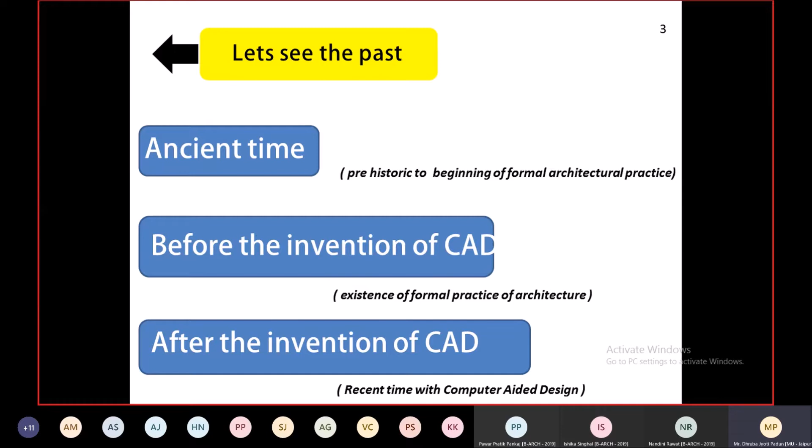Let me go through some facts. The first architect, according to historians, was Imhotep. He designed the first Egyptian pyramid complex around 2600 BCE. These are some facts related to building construction.

The next fact is that the Vedas were written between 1500 and 1000 BC - the holy books of Hinduism: Rig Veda, Atharva Veda, Yajur Veda, and all the Puranas. Then, the Parthenon was completed in 432 BC. And interestingly, paper was invented around 100 BC in China.

So you could see all these projects - the pyramids of Egypt, the Parthenon - were all completed before the invention of paper. You can feel the hard work the designers of these buildings did without having paper, without having any of the drafting tools we have today. Without all these equipments and advantages necessary for architectural education or practice, they designed great structures like the Egyptian pyramids and the Parthenon - all completed before paper was invented.

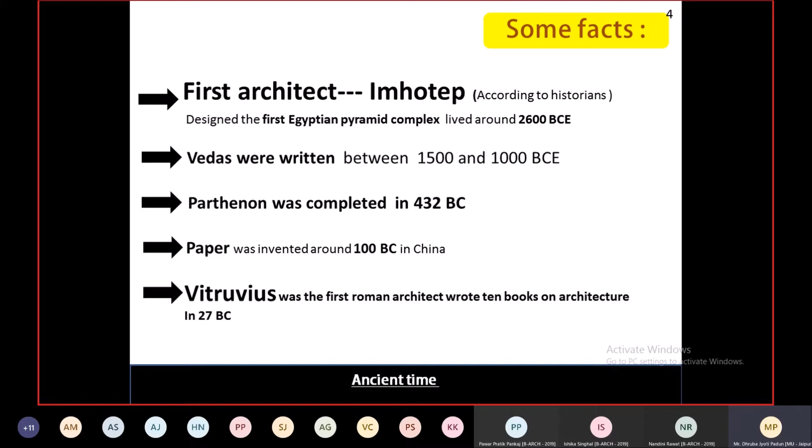If you look at the ancient time, people had very few equipments, less drawing materials, less tools to draw. If you see the cave paintings of Bhimbetka, dating back to the Neolithic or Paleolithic age, you can see how difficult it was to paint on stones without proper sketching tools or inks.

All this was done before the invention of drafting equipment or paper. If you look at the materials used - a bronze tool to scratch into clay tablets - this was the only way people used to draw, make sketches, or design buildings. These were the only tools available at that time, so you can understand how difficult it was to design a building.

Just imagine someone has already designed a building on a clay tablet, and if there is a minor change or modification to that plan, he has to redesign or redraft it again. So how difficult designing a building was in that era has to be understood first, before we talk about architectural software in today's era.

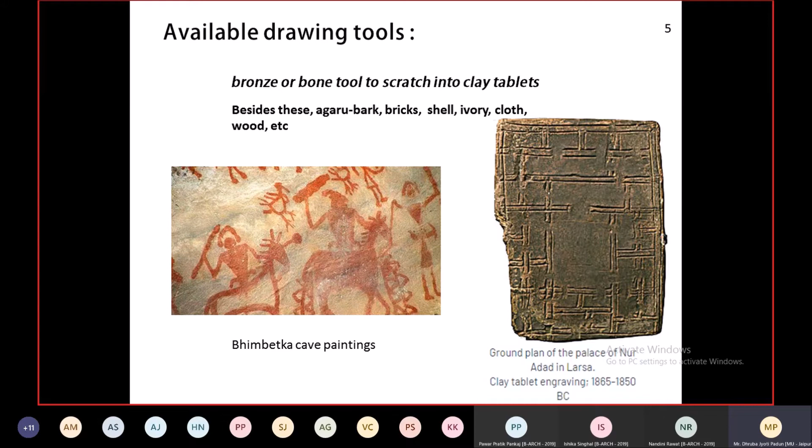Now these are some pictures of the situations before the invention of CAD. People had to lie down like this and draft on large sheets like this. This was very hard - a very complex task to complete at that time.

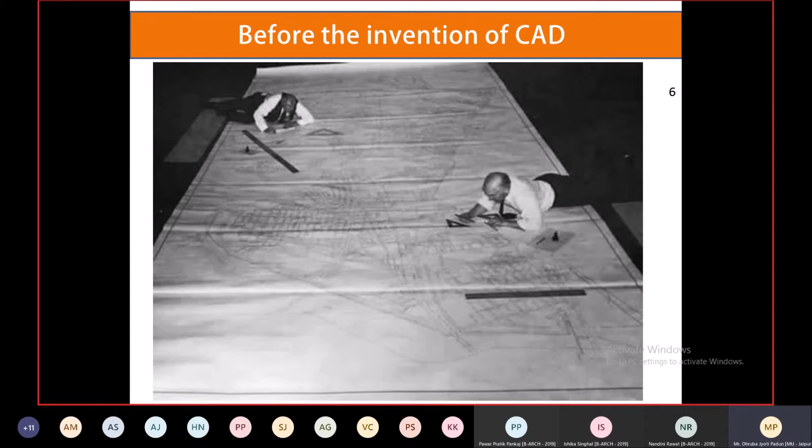Similarly, you could see how people acted like machines, sitting at tables, working on papers with very limited drafting tools and materials. Everything was limited - all the scope, all the instruments were limited at that time.

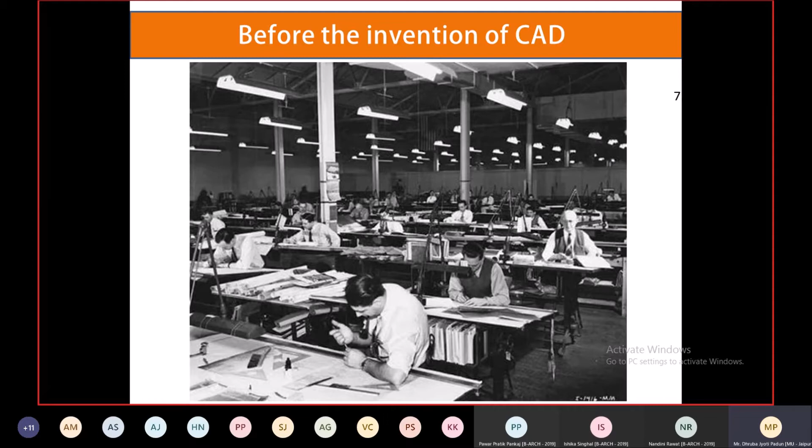So it was a very hard time for the architects or the designers. The process of design and drawing was time consuming. If I had to design even a small residential or commercial building, I had to put a lot of effort and time to complete that design or drawing, because no softwares were there, no computers were there. So everything had to be made through our hands, on papers.

Then there was less option for drawing alteration. This is very important. Without having these advantages, it was a complex and confusing task to do alterations on any drawing or design. One modification meant you needed to redo all the drawings again. So each modification or small alteration would take you another 1.5 months, or maybe 1 or 2 years, to complete the whole design process.

Then the amount of human physical effort required was more. Obviously, when you don't have computers, you have to put in human physical effort. Then human drafting errors were often visible, because when you draft or draw designs with your hand, errors would show up. This led to less accuracy in our designs and drafting drawings.

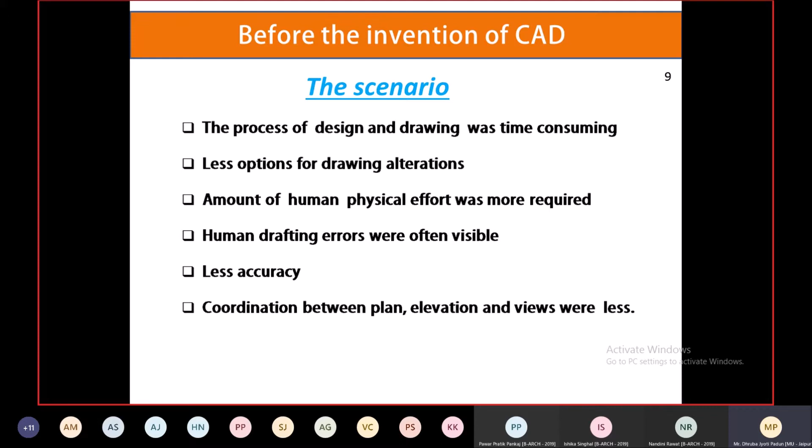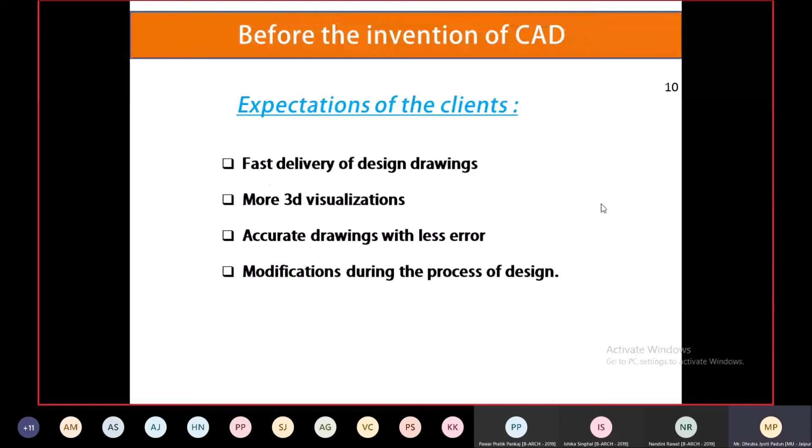But the expectations of the clients were fast delivery of design drawings, more 3D visualization, accurate drawings with less error, and modifications during the design process. These were the expectations of clients at that time and also today. If you see client expectations today, they meet all these points. Even before 100 years, clients wanted fast delivery of design drawings, more 3D visualization, accurate drawings without errors, and the ability to do modifications during the design process.

Now see the scenario after the invention of CAD. Once CAD was invented, we had these advantages: more 3D visualization was possible, fast delivery of drawings was possible, and less errors on drawings or designs was possible now.

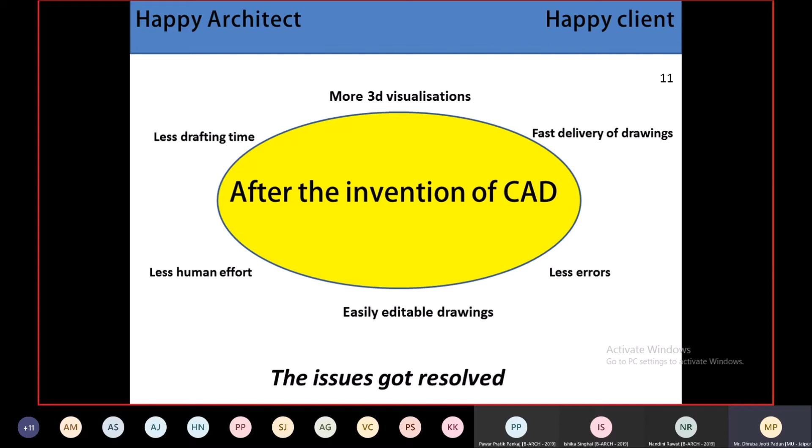Then easily editable drawings became possible. Less human effort was required to complete a design or drawing, and less drafting time was required. Once you draft something, you don't have to redo the same drawing again and again for modifications or alterations. So we have all these advantages now after the invention of CAD. The architect is happy, the designer is happy, and the client is happy too.

Now see the application. If you look at a normal design process, this is how it works: starting from the design brief, then data collection, data analysis or brainstorming, conceptual drawings, preliminary drawings, and final drawings. Looking at the last three steps, from conceptual stages to final drawings, this is where the main application of software is required.

For data collection, we don't need proper architectural softwares like AutoCAD or SketchUp. For data analysis also, we don't need any architectural softwares. But starting from conceptual drawings to final drawings, we need architectural softwares now to complete the project as fast as possible.

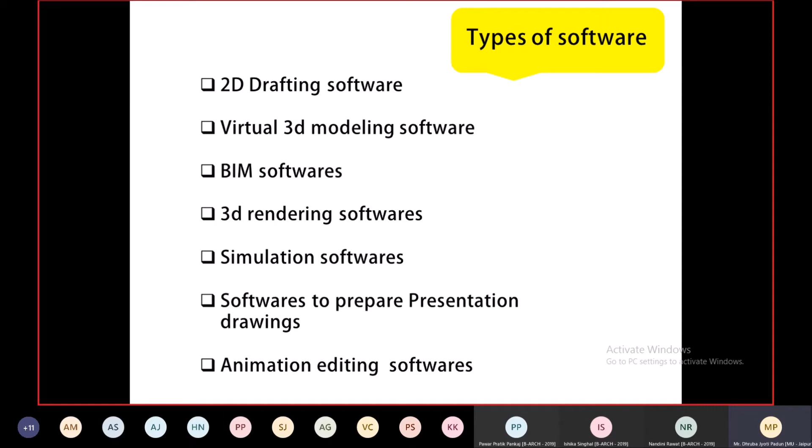So in the building industry, or the architecture and design industry, we have these types of softwares available: 2D drafting softwares, virtual 3D modeling softwares, BIM softwares, simulation softwares, softwares to prepare presentation drawings, and animation editing softwares. We have a lot of softwares, but I have categorized them into these 5, 6, 7 categories, and we'll discuss all of them according to these categories.

Now see, we have AutoCAD, QCAD, LibreCAD, NanoCAD, FreeCAD, etc. So all these are 2D drafting CADs, 2D drafting tools or softwares.

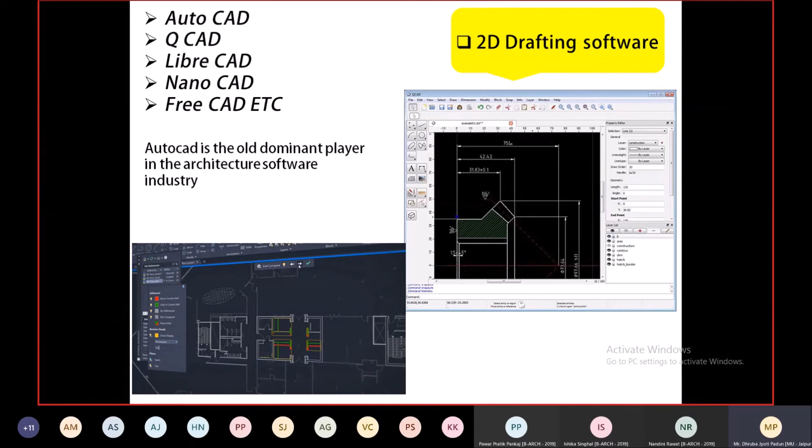So what we could do with these 2D drafting softwares is make normal 2D geometrical drawings. Among all the 2D drafting softwares, AutoCAD is the dominant player in our design industry. And not only in architecture, but in different streams of engineering too they use AutoCAD - for mechanical engineering, interior design, and civil engineering, they use AutoCAD for their 2D drafting.

Then we have virtual 3D modeling software. Some examples are Google SketchUp, AutoCAD 3D, and 3ds Max. It's not like we have only these 3 softwares for 3D modeling - we have more than these, but I have just put these 3 examples in this category. With the help of 3D modeling softwares, we could visualize the 3D of our project and develop a virtual 3D model.

Then we have BIM softwares. Some examples are ArchiCAD, Revit Architecture, and Vectorworks Architect. With the help of BIM softwares, they also have the ability to design 3D visualization, but there is a difference between BIM softwares and 3D visualization software.

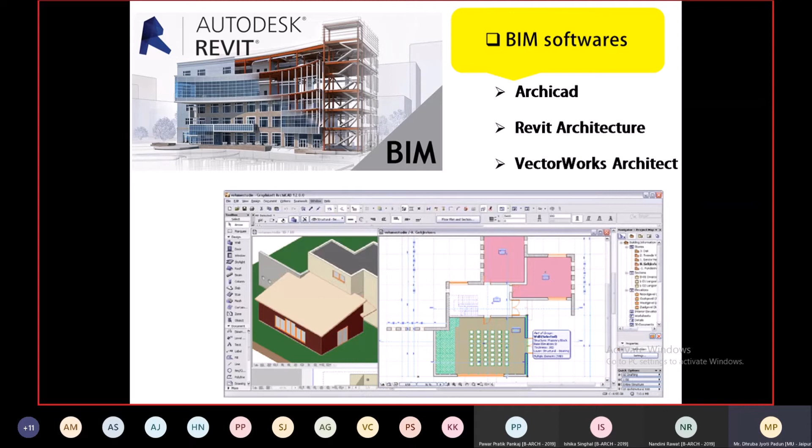In BIM softwares, we could design or draft the plan, and at the same time it develops the 3D, the elevation, and the 3D section of that project parallelly, without drawing them separately in different sheets. This is how BIM softwares are different from normal 3D visualization software. In normal 3D visualization software, we don't need a proper plan - even without a proper plan, we could develop a 3D. But in case of BIM software, we need a properly drafted plan to make it a 3D project.

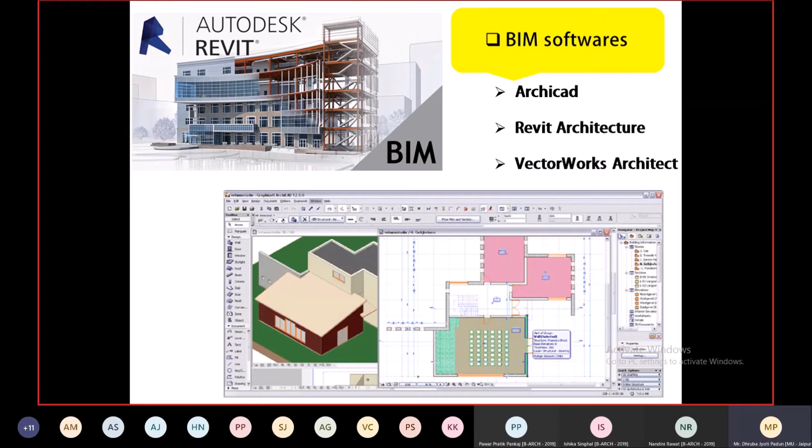Then we have 3D rendering softwares. See what happens in architecture, interior, or any field of design, is that with the use of a single software we cannot complete the project. Just by using AutoCAD I cannot complete my project. Just by using ArchiCAD I cannot complete my project.

I have to use different softwares for different phases of my project. For 2D drafting stages, I will use a different software. For the 3D visualization, maybe I'll use a different software. And after the 3D visualization is done, for the realistic rendering part, I could use a different architecture software available in the market. And once the 3D is done, for the presentation drawings I will use a different software. So all these different phases require the use of different softwares.

So if you see the 3D rendering softwares, we have Lumion 3D, Artlantis, V-Ray, and I-render. These are some examples of 3D rendering softwares.

One more thing to take care of - when you buy your computer systems, you have to see the configuration of your systems. Like for Lumion 3D, to run it you have to have a minimum of 16 GB RAM or 8 GB RAM. All these software requirements need to be met when you buy your systems or PCs. So Lumion 3D, Artlantis, V-Ray, I-render - all these are examples of 3D rendering softwares. Artlantis comes with ArchiCAD. AutoCAD is a product of Autodesk, while ArchiCAD and Artlantis are products of Graphisoft.

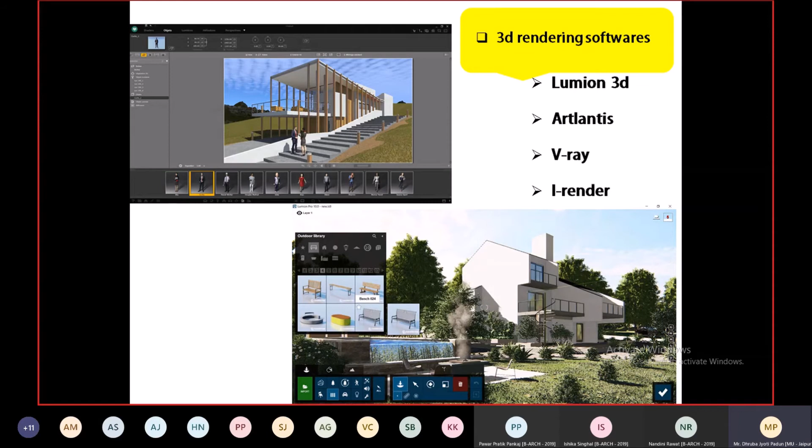Then we have simulation softwares. Some examples are Ecotect, Autodesk Ecotect, and DesignBuilder. What is the use of simulation softwares? Once you do a 3D visualization of a project, you can do experiments with these simulation softwares. You could see how shadows will play a role in your project, how much energy your internal space will get, how much daylight, and how much heat into the space. All these statistics and data you can get with the help of simulation softwares.

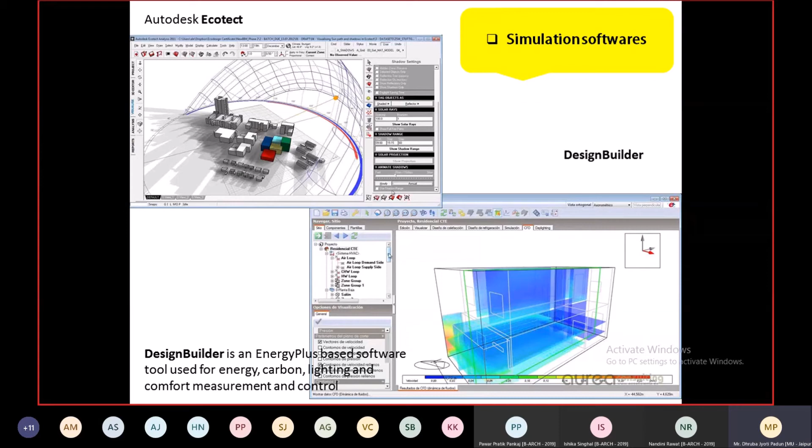Then we have software to prepare presentation drawings. So once you are done with your 3D visualization and the basic architectural drawings are completed, then you have to prepare presentation drawings.

So Photoshop, Pixlr Editor, Canva, GIMP - these are some presentation preparation softwares for architecture and design.

Then we have animation editing softwares: Windows Movie Maker, Adobe Premiere, Filmora Go, After Effects. These are some animation softwares. Because why is animation required?

When you are supposed to make a 3D walkthrough of your project that you have extracted from your 3D softwares, you have to edit it again before you send it to the client or present it to the developer. So that editing of those animations should be done in these type of softwares.

Windows Movie Maker is the basic software that comes with our normal system. We also have Adobe Premiere, Filmora Go, After Effects. A free version of these softwares is also available on the internet, but you could also buy the pro version of these softwares.

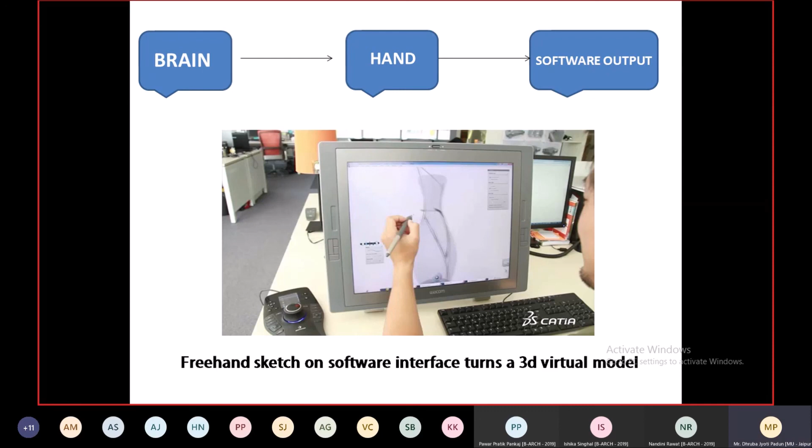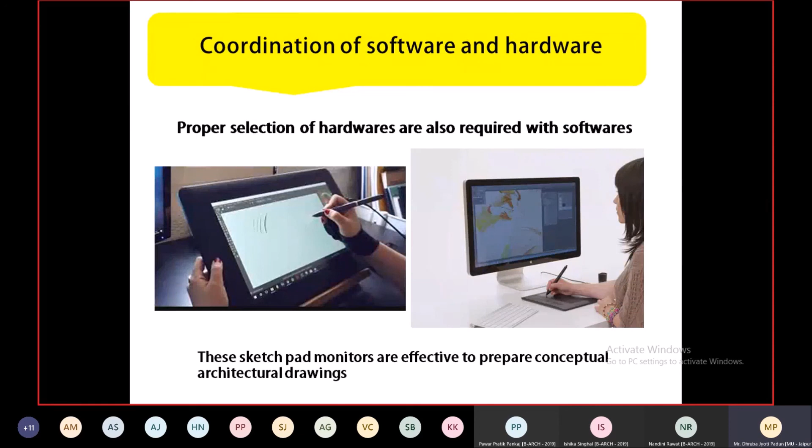So now we need some interface like this. I mean, we already have these things, but still these softwares or hardwares are not that user friendly for architects or designers. So we need some interface where we could directly make the 3D on our sketchpad, or the screen on our laptops or systems.

But we need to understand this fact that software doesn't make you an architect. It is just a part of architectural education. Many students think that by learning architecture softwares - AutoCAD, ArchiCAD, Google SketchUp, Lumion 3D - just by learning the softwares, they would be able to become a good architect or good designer. This is a myth. This is not correct. This is only a part of architectural education.

You can only become a good draftsman just by having good skills of architectural softwares, but you cannot become a good designer or good architect with the help of architectural softwares alone. It's a part of architectural education - we need to respect it - but to become an architect or designer, my philosophy should be different. And to become a draftsman, my philosophy is different. So we need to keep this in mind: software doesn't make you an architect, it is just a part of architectural education.

So this is what I wanted to share from my side to make you understand the requirement of architectural softwares in the field of architecture.